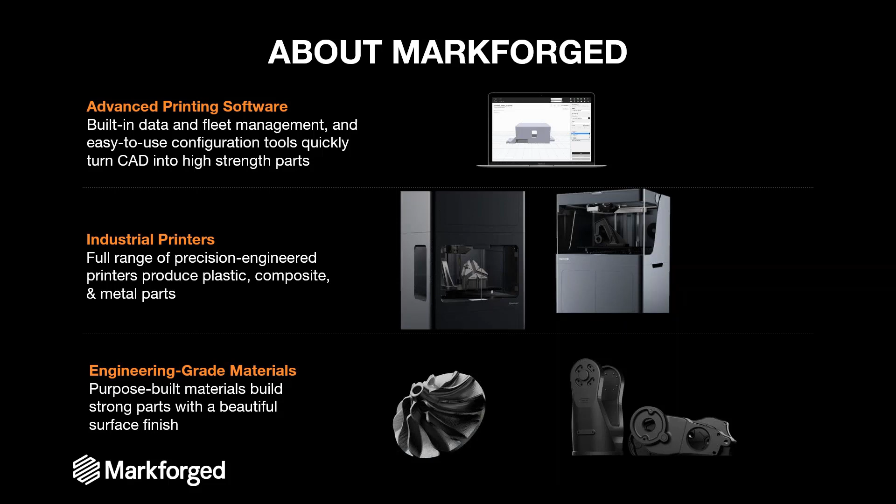One of the concepts or points that the guys at Markforged, who are out of Boston, talk about is the fourth industrial revolution, or Industry 4.0, about digital manufacturing and how 3D printing is a part of that. So we had the steam engine, we had the assembly line, we had robotics. Industry 4.0, as much as it sounds like a marketing tagline, it is being dubbed the fourth industrial revolution. Digital manufacturing, 3D printing is one of those pillars.

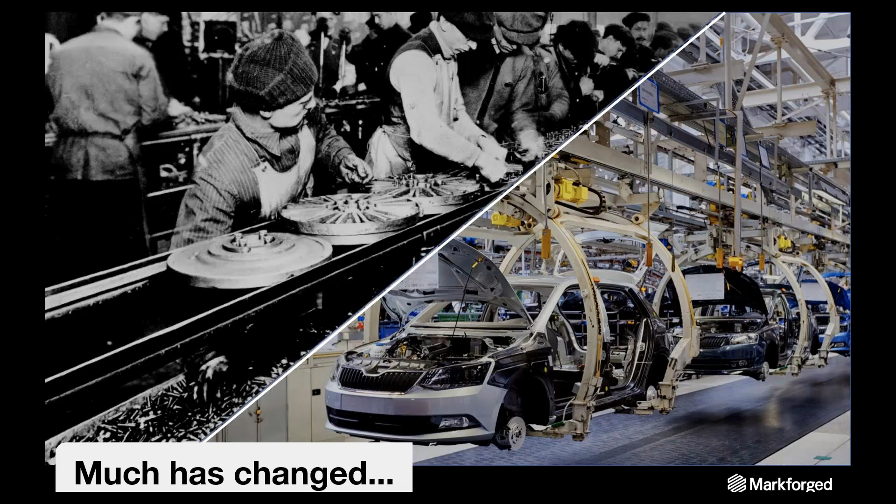You can see here we can look back to the early 20th century, and now we're looking at the 21st century digital manufacturing automotive assembly line. A lot has changed.

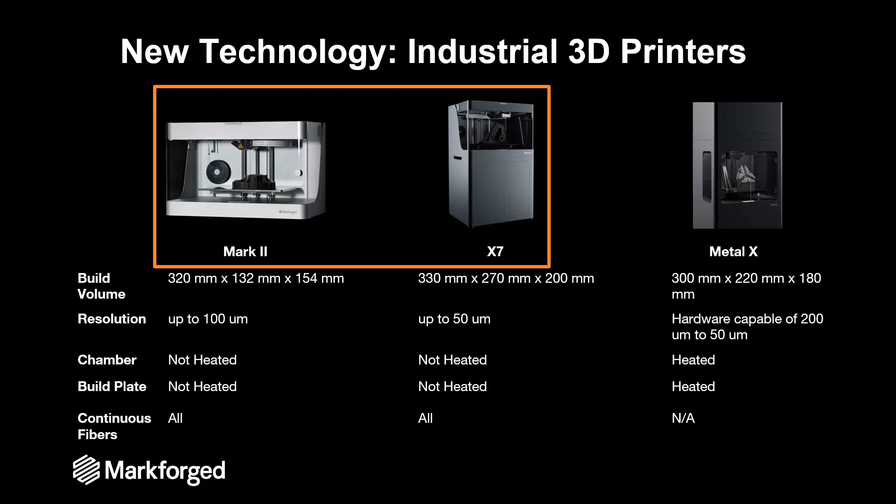One other point to touch on before we carry on here, the base material, the composite, if you will, for Markforged is called Onyx. Onyx is a nylon 6 and it has 20% chopped carbon fiber. Because of that, and thermal expansion properties of a material with 20% carbon fiber, you don't need a heated build plate. You don't need a heated chamber. You don't need to spend an hour warming up. And you can use the same fiberglass build plate for every print job. In other words, no one-time use print sheets.

So just to review here, you have your STEP file. Maybe you've created it in SolidWorks. Step 2, you're going to slice and reinforce. That is within the Eiger software. We're going to get into that after maybe another 10 minutes here. And then you're going to print your part. CAD, STEP file to STL file to physical model.

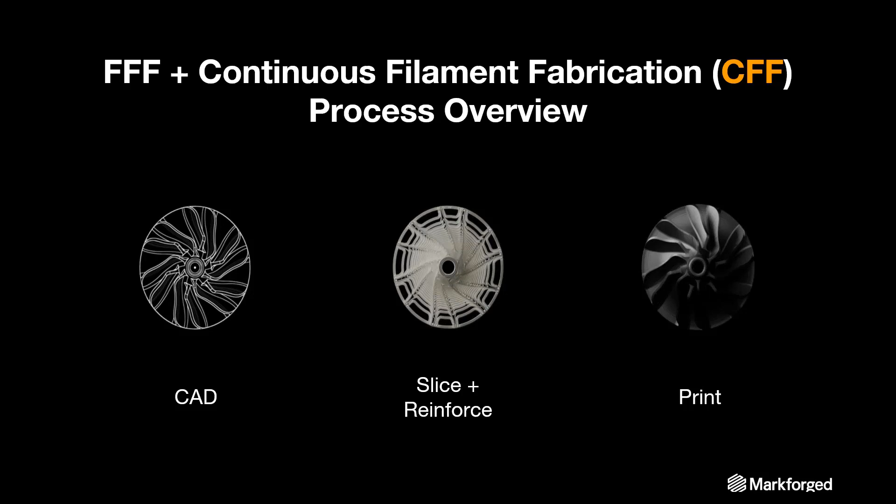The materials, we talked about the base material onyx. So to compartmentalize this, we have a base material onyx and we have a reinforcement. The reinforcement is like rebar and concrete. It strengthens what you're laying down, layer by layer. Carbon fiber, Kevlar for impact resistance, fiberglass, and then if you have maybe a welding bracket or something where the environment or ambient temperature dictates it, you can go with high strength, high temp fiberglass.

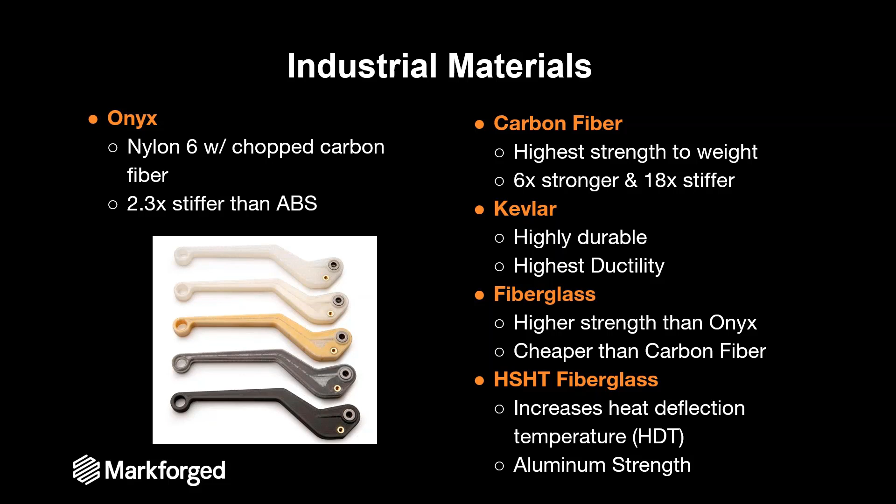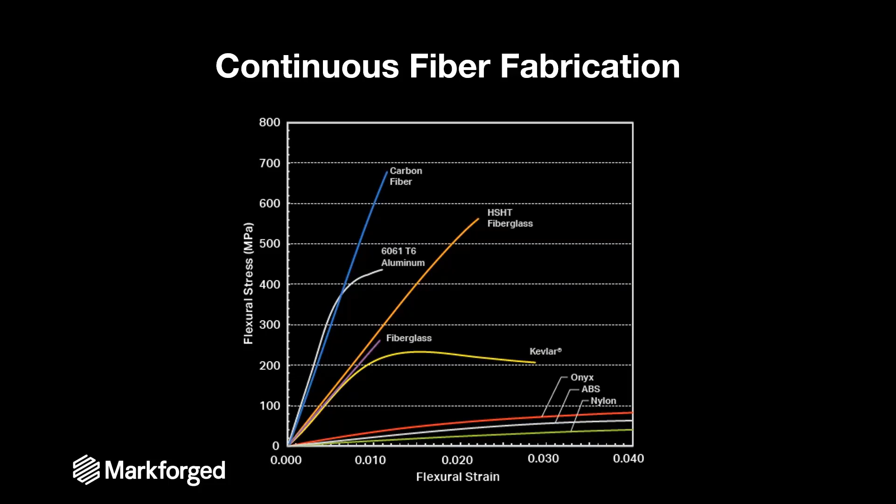Down in the lower right-hand corner, you're going to see ABS, nylon, and there's that onyx material from Markforged. Just the base material of onyx, because it has 20% carbon fiber, is going to be stronger than ABS and nylon. If you're out there evaluating a 3D printing solution for your shop or your garage at home or whatever the end use is, onyx is inherently stronger because of that chopped carbon fiber. And again, the main differentiator of Markforged is that you can reinforce that onyx with the carbon fiber, the fiberglass, or the Kevlar.

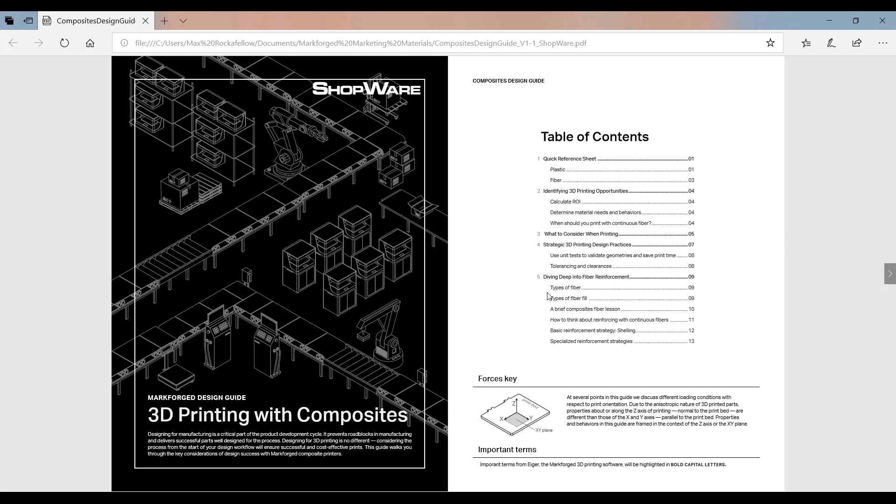So let's just run through this thing. I'm going to skip pages 6, 8, 11, and 12. I realize the text is a little small, but we're gonna go through the main takeaways here, and then we're gonna get into the Eiger software. So this is a quick reference sheet, part of this designing for composite printing. On the left-hand side here, it's essentially telling us that we have these build volumes that we referred to earlier. Again, the Mark II is 13 by 5 by 6. The X7 is 13 by 10.6 by 8, roughly.

And when you're printing, you have minimum sizes. And so this is important because not everybody's part is going to be at the maximum size of the build volume. And there is a minimum for which you can actually reinforce a part. So in other words, the minimum part size is 1.6 by 1.6 by 0.8. There's not enough room to lay down carbon fiber reinforcement. The next page will show us what those minimum requirements are. But in this instance, you can see on the left-hand side, there's a minimum 40-degree angle where you might need supports. And there are minimum sizes and size restrictions on different facets and posts and diameters.

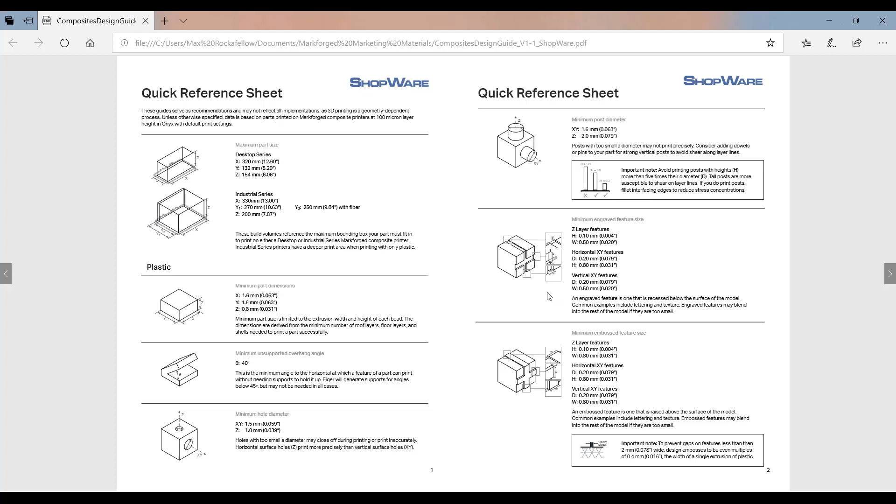This sheet right here, so there's a lot of stuff where you can get into the weeds.

But I want you all to be aware that this information is available, and this information can be disseminated, and why it's important.

So when we engage with manufacturers about a 3D printer, there's the technical box to check, there's the commercial box to check. So not a new concept here, but depending on the volume and the complexity of the geometry and the forces involved, a part may or may not be a good candidate for 3D printing.

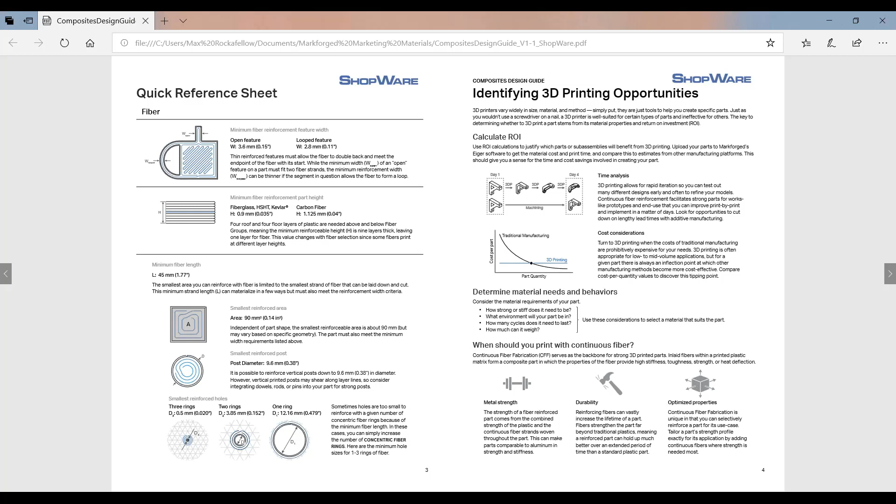DFAM, Design for Additive Manufacturing, is a new acronym in the world of Industry 4.0. Essentially, designing for 3D printing can be optimized, and it's just a slightly different mindset. And I think you guys get the idea. Going ahead here to page 5.

You want to lay the part down so it has a maximum amount of area in contact with the bed. If through holes are of a critical importance, if those dimensions are critical, you want those through holes in the Z rather than along the XY plane. If you have forces in tension or compression, and we'll get into that in a little bit, that will determine how you reinforce it with carbon fiber.

If surface finish is of importance, maybe you're making a pattern for sand casting, you might want to print with 50 micron rather than 100 or 200 micron. That takes more time, but is probably needed by the application, right? So again, this sheet goes into the weeds here on all these different topics, and we're going to keep skimming along here at the high points.

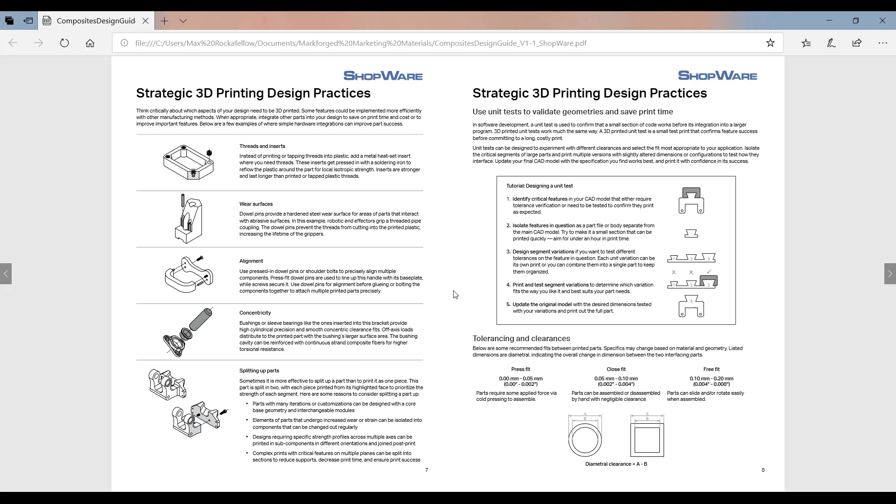And I'm going to compartmentalize this and convey that there's concentric fill and there's isotropic fill. That's the big takeaway from this part of the presentation.

All that is set up in the Eiger software. Again, concentric is just rings. Think about it again as rebar and concrete, rings around the outside perimeter of the part.

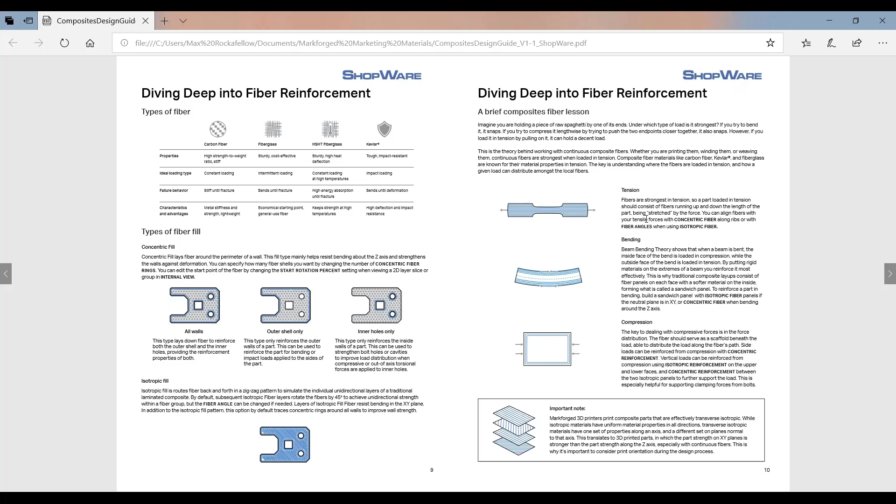On the right-hand side of our handout, what we're looking at, page 10 here, is again, parts might be in tension, compression, and then in a bending application, you've got both. There's different ways to lay down fiber that maximizes the strength based on the load and the type of load that you're seeing. Page 11 and page 12 is more of a deep dive on reinforcement.

Again, I want to show, based on your guys' experience level, that this information is here, it is available, it is documented, and if we were to talk about a benchmark part, or if you were to ask for some support on a part, this is the type of conversation we would be having.

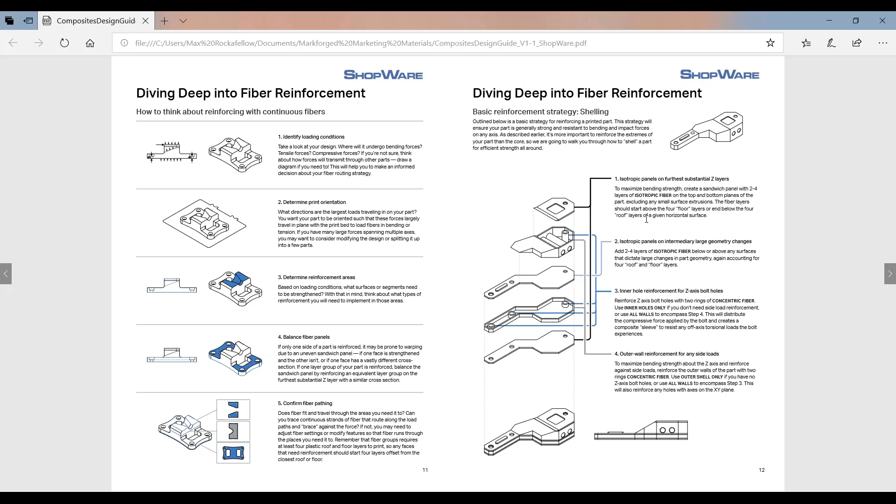Also, when it comes to carbon fiber reinforcement, not only is there concentric versus isotropic, but you can also change the fiber angle. That's important because if your load is coming from this direction or that direction, you want to lay your fiber in a specific orientation that counters that load. So we'll show you in the Eiger software how that can be manipulated.

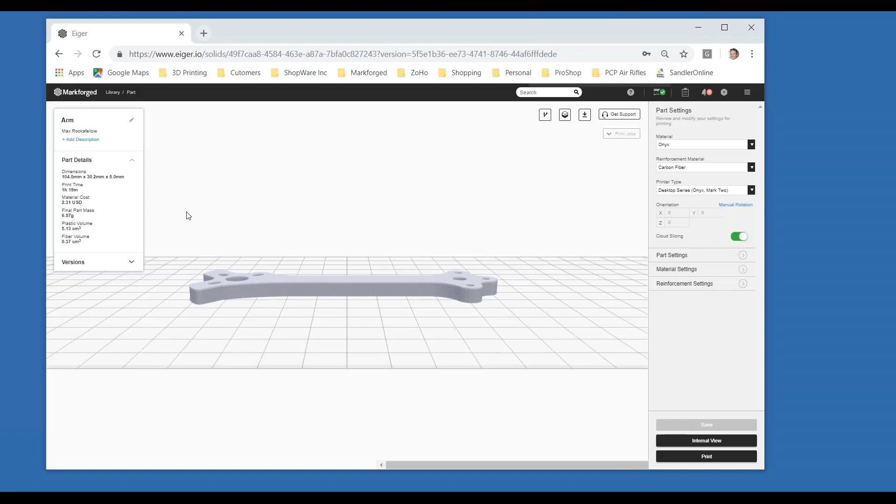Okay, so why don't we go through the Eiger software. This is the third part on our agenda this morning. The Eiger software is a cloud-based slicing software that Markforged, through their own software development, have created specifically for their printers. The cool part about Eiger is that, and most slicing software will do this, I'm going to zoom in. Okay, there we go. So this part is called an ARM.

It's for a gas-powered model airplane. When you're thinking about the commercial side of, does it make sense to own a printer and print these parts, you probably want to know what your material cost is. So Eiger will tell you down to the penny what your material cost is, the mass, which is important if you're doing end of arm robot tooling, lightweighting a part, or a part of a larger assembly, and how much volume of the plastic, that's onyx, and how much of the fiber volume, in this case carbon fiber.

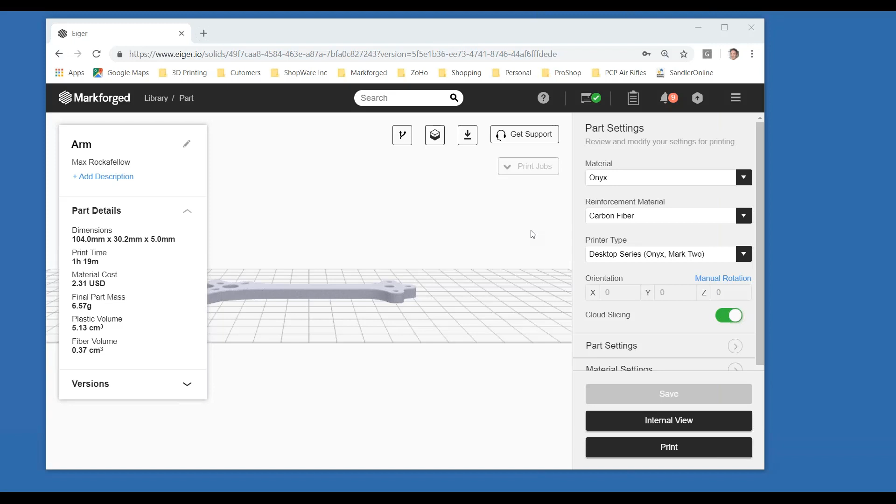So in this case, I'll maximize my screen here. In this case, we have onyx, and again, I mentioned all these other materials earlier. Flame resistant onyx, nylon white. These are the 3 materials that we can print in. So we're printing with onyx because we're talking about composite printers.

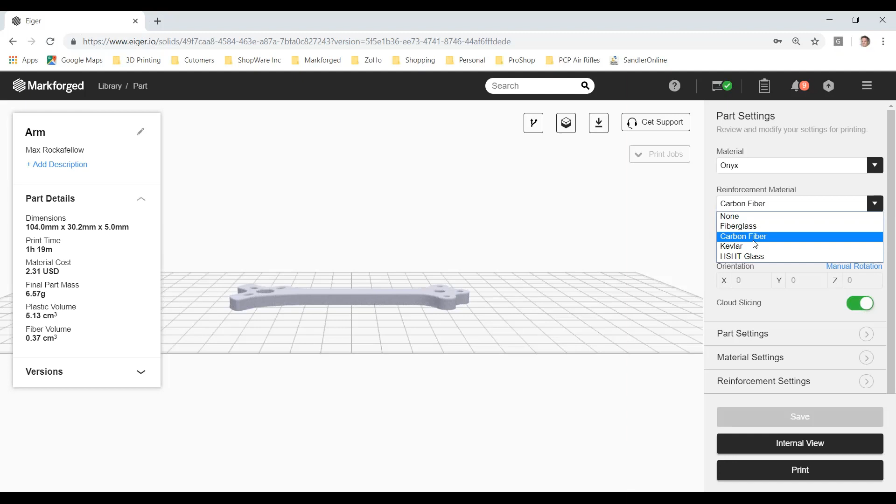When we are talking about reinforcement, remember we talked about fiberglass, carbon fiber, Kevlar, and high strength, high temp fiberglass. So we'll stick with carbon fiber. I'm going to zoom out here. Part settings. So here's all the parameters. So when you upload a part, you pick Onyx, you pick your reinforcement, and then Markforged has a lot of the other parameters set as standard, and you can tweak them based on what you're doing.

In this case, this part doesn't need supports. You can change whether or not you want supports. This little mini graphic that popped up: supports in the Markforged world are printed from the base material, the Onyx. It's the less expensive of the two, carbon fiber versus Onyx. And it's printed in a way that can be easily detached by using your fingers. If you have a through hole, maybe you need a butter knife or some needle nose pliers to get it out. Other printers out there have water soluble supports, not Markforged.

These are removable supports. If the part is curved like the example in this pop-up box, or if your angle on, say, a welding bracket is greater than 40 degrees, it's going to print supports, and you're going to need it, or else the material of your part will just fall down.

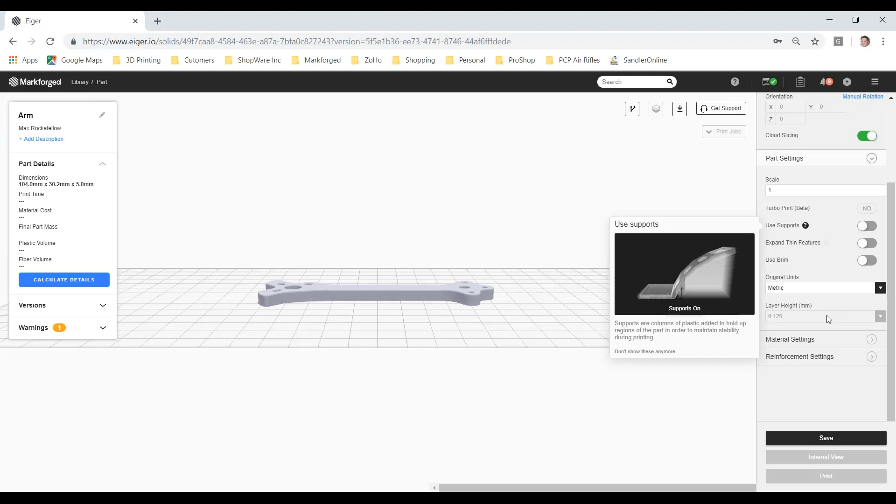In our case, we have a layer height of 125 microns. That is the minimum layer height we can print with reinforcement. I mentioned printing with 50 microns earlier. That is if you're on the X7 printer and you're not using any reinforcement, you can go down to 50 microns. So I'm going to close up part settings. We'll look at material settings.

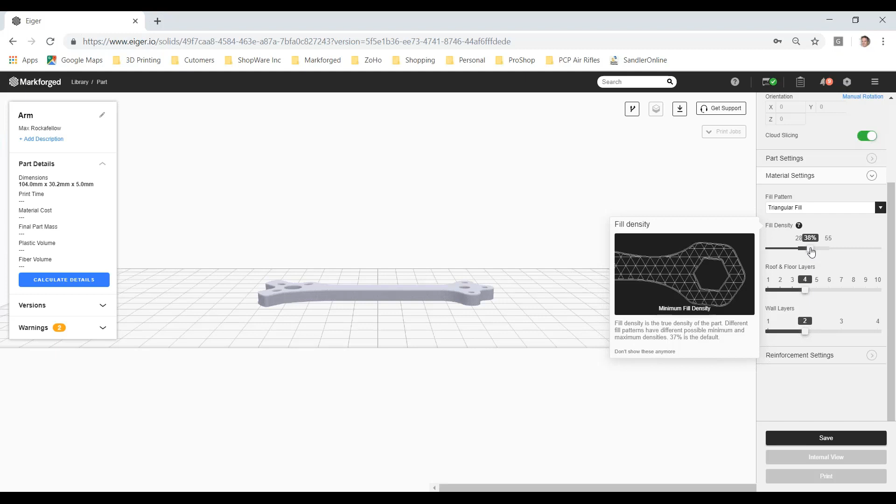The infill, or the lattice work on the inside of the part, can be solid. It can be rectangular, hexagonal, or triangular. Markforged recommends triangular with 37%. I printed a part once with a fill density of 28 to save time and money, but it doesn't always work because the material on the top and the bottom, say you're looking at a cube, it might sag a little bit. So if aesthetics or just having a professional looking part are important, we're going to sit here at 37. And you can play with these, go through iterations, go through trial and error if you own a printer and you're using the Eiger software to find what works best for you.

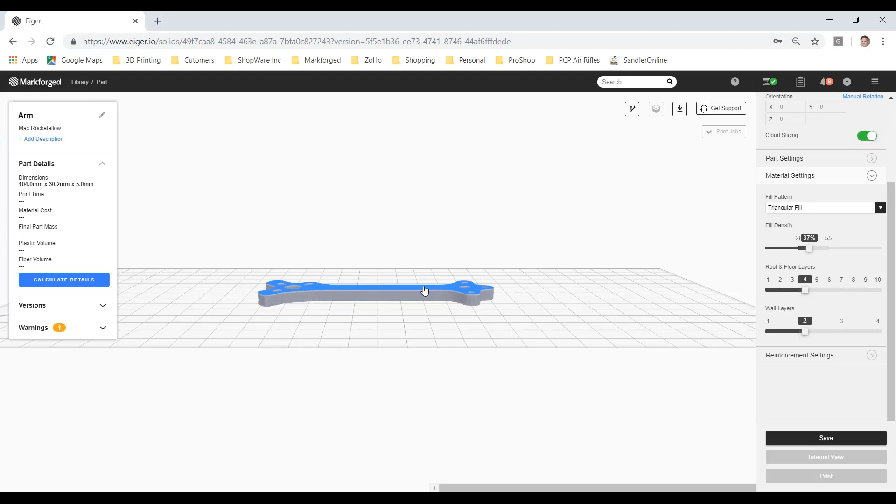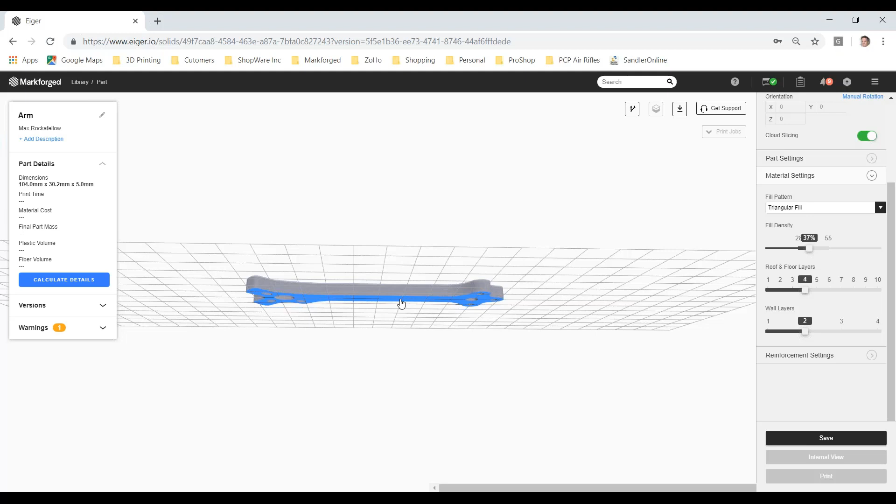Roof and floor layers and walls are the next two settings here. These are interesting parameters because roof and floors is the top, highlighted in blue, right? And then down here, the floor. So how thick is that wall before you get to that triangular infill or lattice work, right? So if you're not gonna attach an insert to prevent the excessive wear of a part, or maybe it's in a sand casting application, you can make the roof and floor layers 10. It'll be really thick. And then in the middle of the part, it'll be the triangular infill.

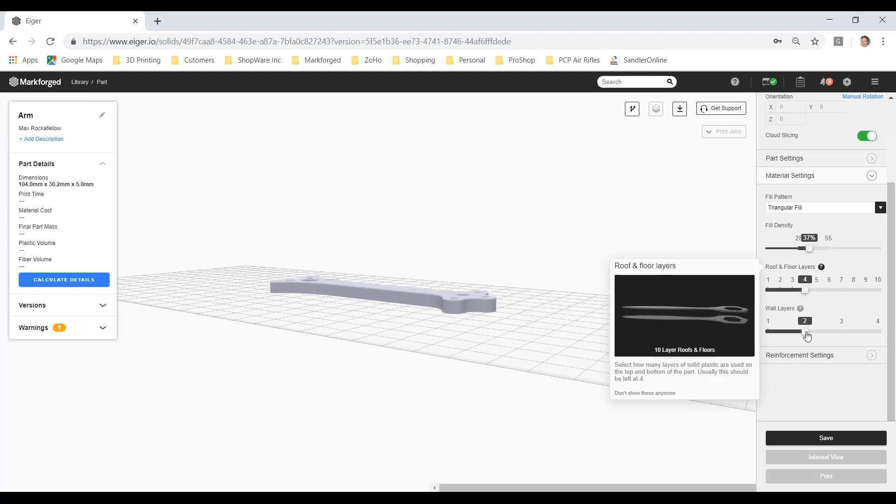The walls, same concept. In this case of the part, we have a lot of curved surfaces, but the wall is the side. Each layer, whether it's a roof and floor or a wall, is about 400 microns. So we're sitting at 1.6 millimeters with 4 as our default, and 0.8 millimeters if our walls are a thickness of 2. If you had a metal 3D printer, this would be even more important if you wanted to post-process, face, turn down a part, what have you. You can machine these guys after the fact. You might do that to open up a hole or do something for surface finish. The point is that in addition to the reinforcement topic, there's also how thick do I want my walls or my roof and my floors.

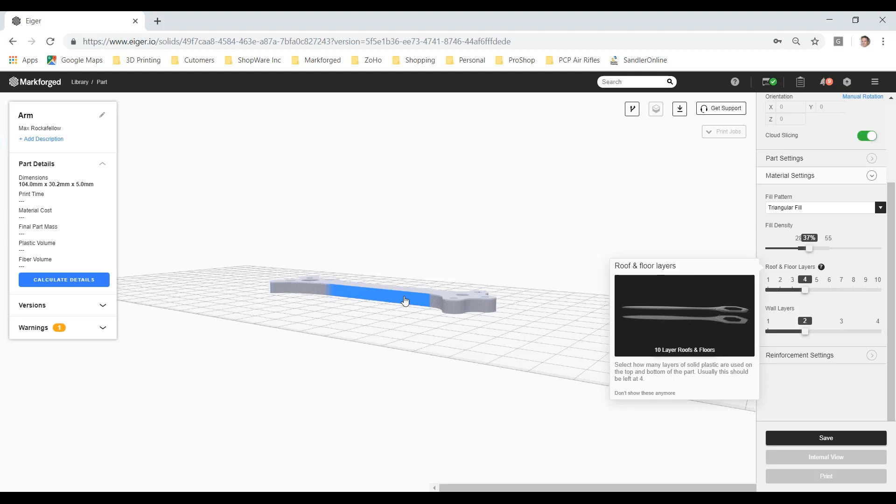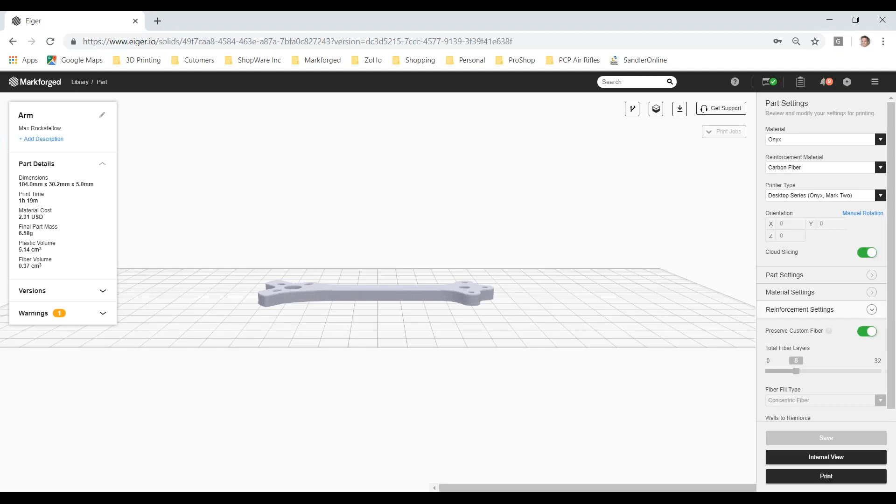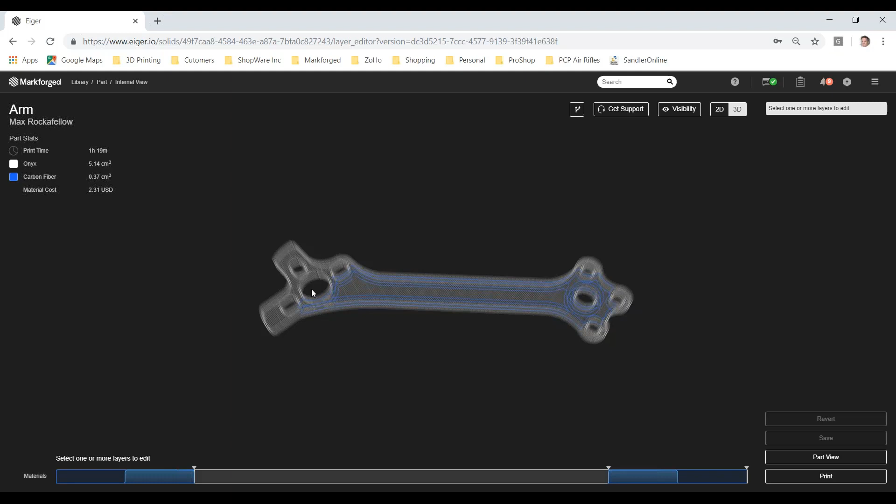So I'm going to close up material settings, go down to reinforcement settings. These are grayed out, and they're grayed out for a reason. That's because I have set the carbon fiber reinforcement for this part. I did all the work in the internal view. So if you said, Max, I got a part, in this case, it's going to be in tension because I have these bolts coming through here, and this is supporting the landing gear on a gas-powered model airplane. You know, one of those $5,000 or $10,000 airplanes that people bring to local airports to fly for fun.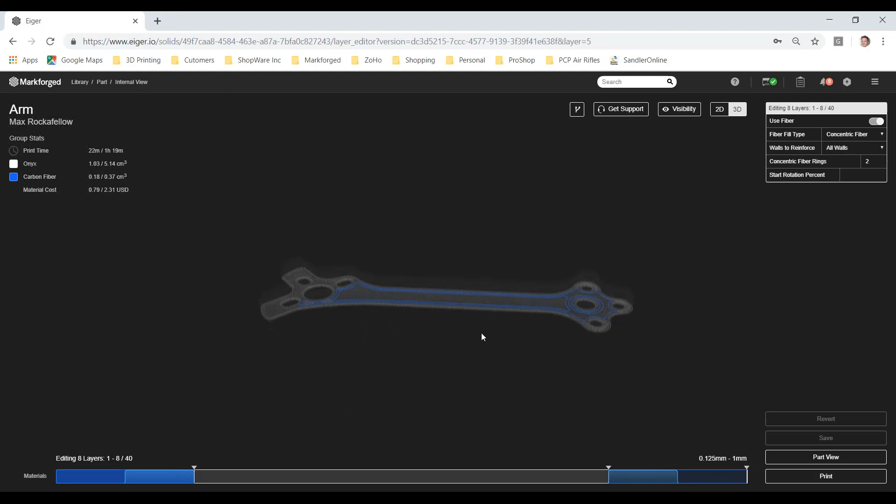Okay, so the blue perimeter around this part, that's carbon fiber. And you can see that it's on the top and it's on the bottom. By default, what Markforged will do if you turn on carbon fiber reinforcement is it will reinforce a few layers on the top. Oop, I'll click over here. A few layers on the top. I know that blue is a little faint. And a few layers on the bottom. Not as faint. So we're kind of looking at like a ghost image of the part. The blue is the carbon fiber. The gray stuff you're looking at is the Onyx, or the part.

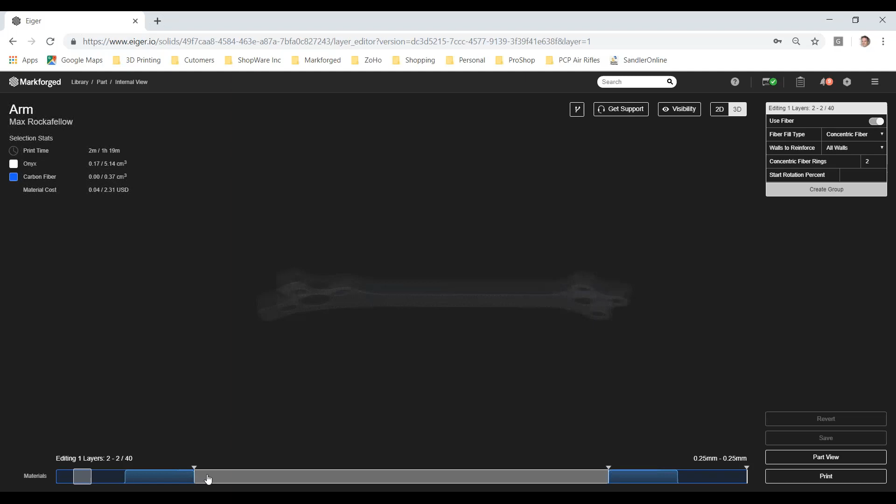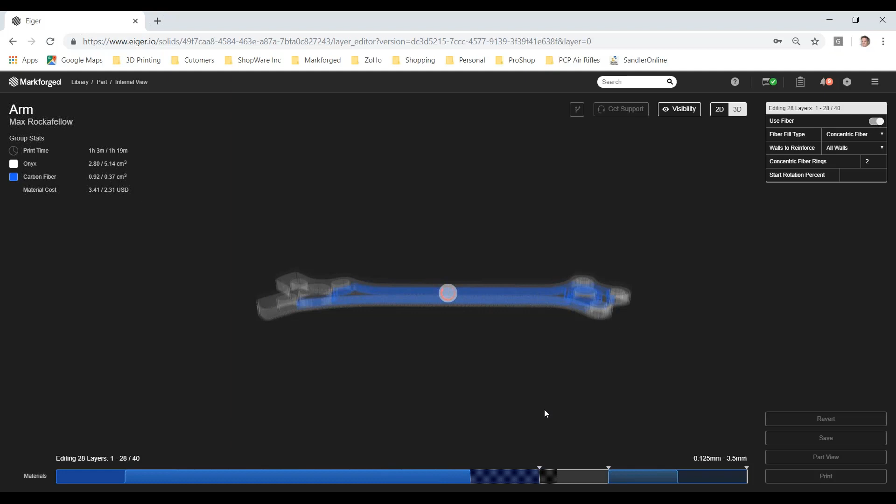This part has 40 layers. If you can follow my mouse in the upper right-hand corner. If you come down here, I happen to click on layers 1 through 8. I can drag this all the way across. Catch up. Cloud slicing. You can decide layer for layer what you want reinforced. If you want, out of a 40-layer part, only layer 2 reinforced and layers 1 and 3 through 40 not, you can do that. You can have all of the layers reinforced. This is how you do it. You use the sliding bar at the bottom. So now we have a lot more blue. That's more pronounced, right? So this is customizable.

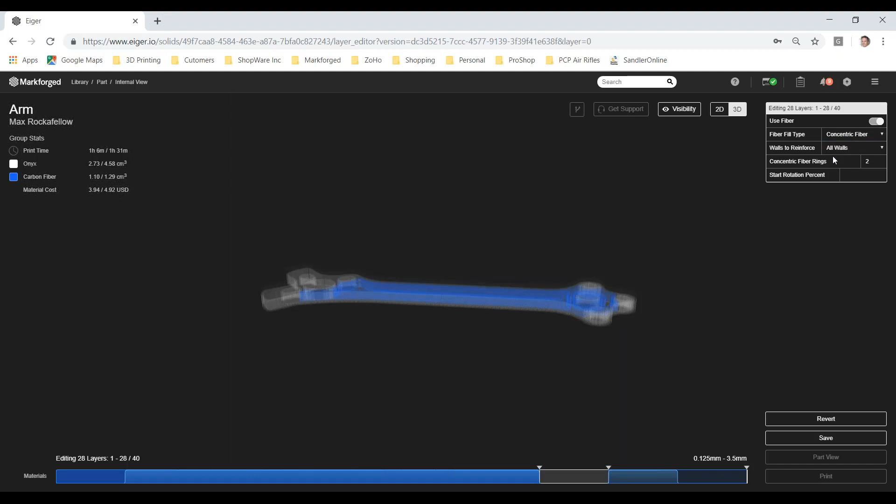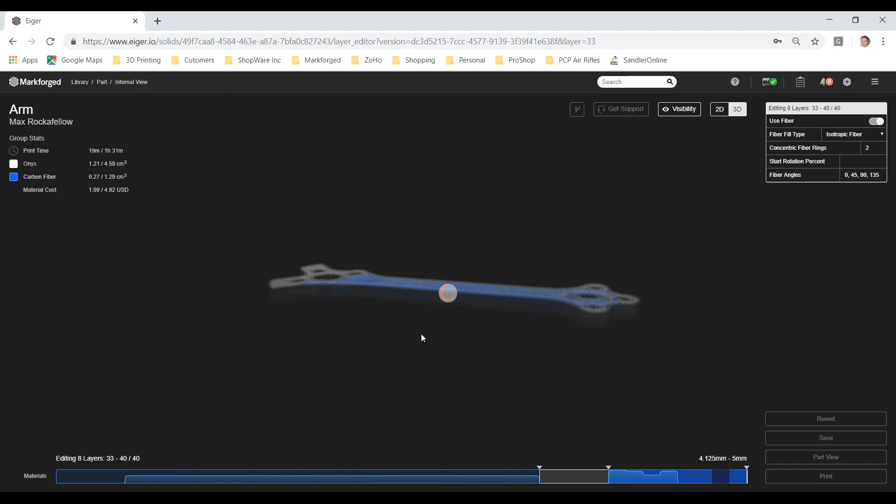Going back to concentric or isotropic fiber, you can see we're at concentric and we have just layers of fiber around the perimeter. If you want to choose isotropic, you first click on which layers you want to do that. In this case, I'm going to click on layers 33 through 40. I'm going to change it from concentric to isotropic. If our Wi-Fi is fast enough, this will slice and save in a fair amount of time. There you go. So now I'm going to zoom in.

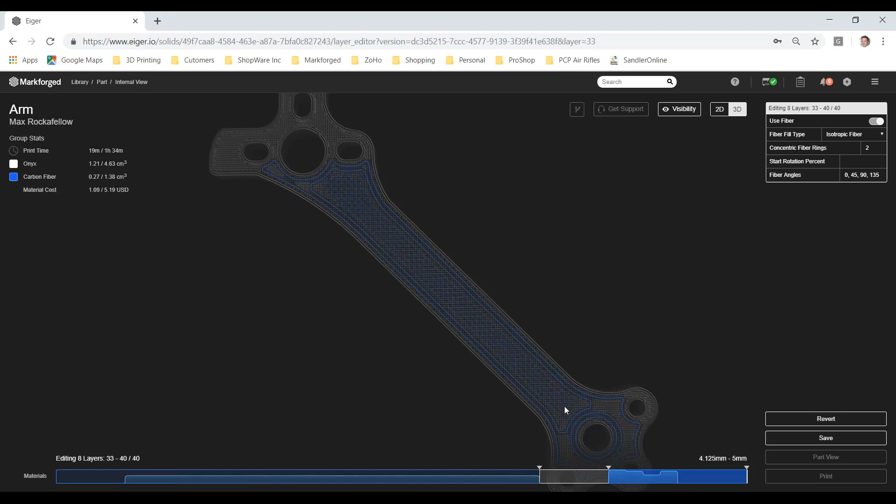And if you remember, I said concentric is just rings around the perimeter. Isotropic is everything in the middle. And if you look right now, I know it's a little faint, but there are all these blue lines in the middle that outline every piece of triangular infill. That's isotropic reinforcement. If we go back to the concentric reinforcement of layers 1 through 28, again, we've got both types of reinforcement in this part as a demo. How many rings do we want? Well, I want it to be pretty strong. So 2 rings is default. I'm going to go to 3.

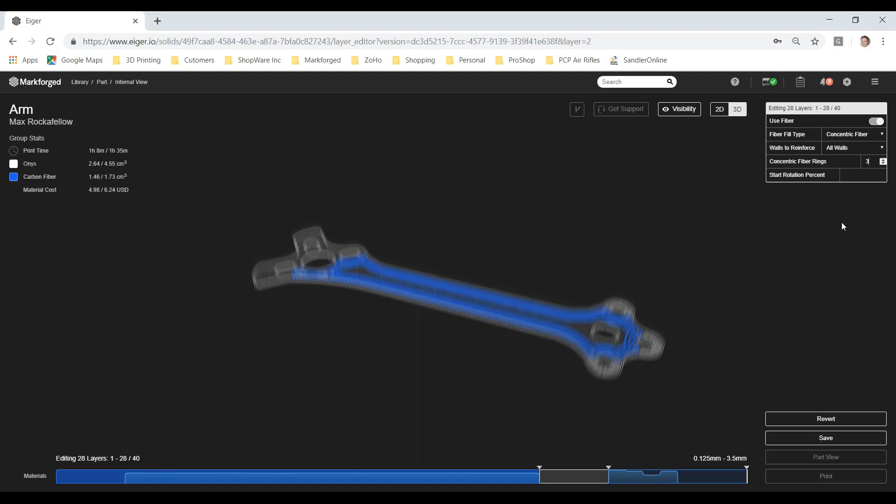So some people ask, Max, what's physically going on when this printer is laying down carbon fiber? So there's one print head, there's 2 nozzles. One nozzle's Onyx, one nozzle's carbon fiber. They're each around 270 degrees. They're pretty hot. And if you were printing this part, you're printing 125 micron layers, the first layer. Because we have layers 1 through 28 with reinforcement,

this printer is laying down carbon fiber in between the layers of Onyx that it's putting down for the walls, for example, for concentric fill, because again, they're rings around the perimeter. So are we laying down carbon fiber on top of the Onyx? It's inside, so to speak. They're being done in series, one after the other. So put a bunch of Onyx down. That's one nozzle. Go to the other nozzle, lay down carbon fiber, cut it, and then go back to Onyx for the next layer, layer 2. So it's printing either or, one right after the other.

And so we're going to go back to layers 33 through 40, or again, isotropic fill. We can also affect the rotation percent and the fiber angles. So when you're in your part for isotropic fill or fiber, the angle of the fibers relative to the load is important. For example, because this part is essentially 40 layers, or 40 sandwich layers, you wouldn't want that to potentially shear. So you might want to lay your isotropic fiber perpendicular to that, for example, right?